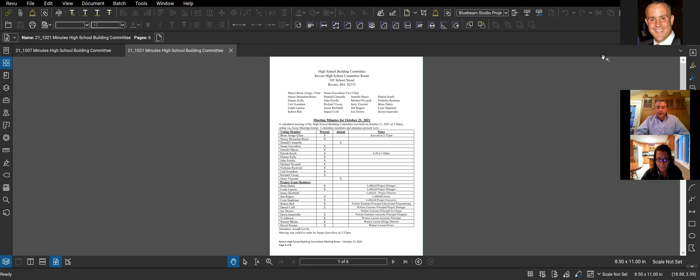We have a project update that Perkins, Eastman, and Warner Larson are going to walk the committee through. I might chime in here and there, but we'll do a quick schedule and process update, and a two-week look ahead after the update. I figure we'd get right into the update first.

So this is where we were as of the last school building committee meeting. Since this meeting, you can go to the next slide. Jack G might want to mute. Yeah, please mute if you're not speaking. So since the last meeting, the Revere Housing Authority, as you all know, voted to remove the property, or not make it available. So even without a vote of this committee, it certainly diverts our attention.

And that basically means we had three viable options in the middle here. So, Erricola Park on the existing site boundaries and constraints. We had a version of Erricola with some expanded land acquisition. And then of course we have Wonderland - not the full Wonderland site, but a medium version, the two-thirds version. So, next slide.

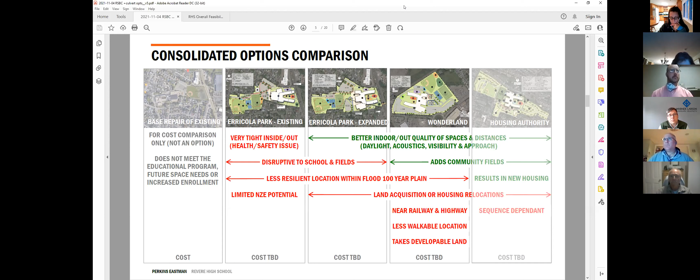So I'm going to work backwards from the Wonderland site. What we've done is we've taken some of the comments we've heard over the last couple of building committee meetings and started to try to address them. So this plan you're seeing right here is nothing new. This is the plan you had seen previously.

Some of the comments and critique we heard were about the bus and car loop and the queues - are we really maximizing it? We also heard that we maybe needed to move more parking to the fields, to surround the field with parking between the building and the fields, so it serves the after-school purposes as well. And also to look at, in all the options, the service and approach.

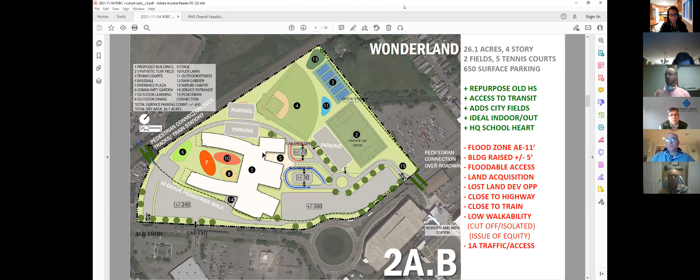So we did a refinement to this option. These are just graphically depicting how we can transfer some of the parking and maybe a different attitude about the bus and car loop. So, next slide.

You can see what we've done here. It's a suggestion, and anything we're showing here will need to be further vetted with our traffic engineer, and again, any comments and questions we hear. But what we're trying to do is maximize the bus loop and the car loop. So instead of having them as two separate loops right in the front of the building, what we're showing is that the cars would come in over at the light at Wonderland, and it would really own the frontage of the building.

So we're trying to maximize the queue. In this case, we have a 52 car queue. Ty, correct me if I'm wrong, but I think that's significantly more, maybe even double, the car queue at the existing school - although we know parents are using all the surrounding streets and parking lots as well. In this case, we've separated the bus loop and have it going around the back of the building. The idea is that this can be controlled so the back loop is really an emergency access point. It can be gated and shut after bus drop-off, then controlled for pickup as well.

But what it does is it goes around the back of the building and drops off pretty much at the entry close to the gym. So it's still a relatively short walk, pretty much a common area for both cars and buses to drop off at the front of the building.

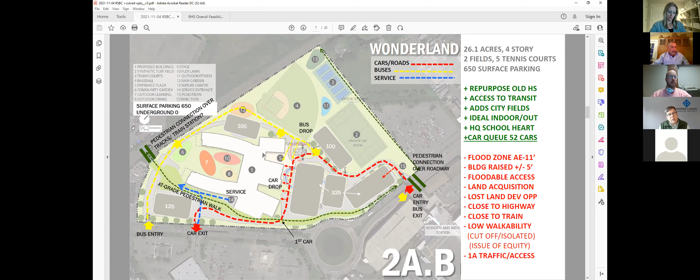Brian, you can go on to the next one. So moving back onto the existing site, this is the option you've seen previously, sometimes referred to as the bow tie. You're seeing that the existing property lines along with the culvert wedge the building, and that also kind of pushes the building pretty much against Route 60.

In this case, we were showing fields on the far left, pretty much the bulk of parking in the middle. I believe there's 255 spaces underneath the building, but again, 650 total.

So we took a look at this one too. You can see right now we were showing just preliminarily the bus loop coming in, I guess on Cary Ave, and getting the front of the building, and then the cars were coming in on School Street and looping around. That's a concern for Cary Ave. It also doesn't really leave a lot of space for the bus - the bus and cars are competing.

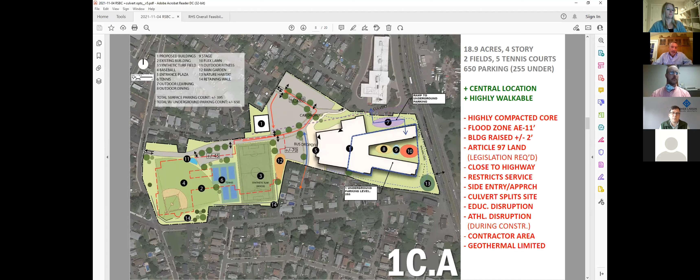So the next slide shows, again, a variation. This is just one iteration, but what you're seeing is the building and the fields. In this case, we've now maximized the car loop, so if the cars are coming in off of School Street, they really own the front of the building as far as drop off. And there are options here.

They can exit out True Street. They could return along the approach drive and exit out onto School Street. It's doubtful in this case, but they could possibly use Cary Street.

In this option, we were suggesting maybe the buses come in True Street, but we know that the far end, the northwestern end of True Street, is kind of that five-way intersection with an island. That's a concern for navigation. So to do this, it would take some work at the other end of True Street. But that's only one scenario.

We had the buses coming in and skimming the northern side of the site so they could drop off students into a secondary - or really, actually that's the main entry on the north side.

And it's possible that the buses just come in off of School Street as well, just as the cars do. But their drop off point, again, is kind of on the north side of the building as opposed to the cars that are looping around.

It would still take a bit more work. This is certainly a pretty tight site. You can see the culvert is the purple line that runs through from the west to the east.

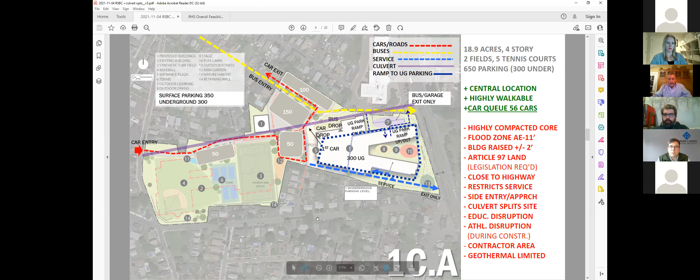Bob, want to keep clicking? Yeah, we can continue through, which is your segue really. This option that we're going to discuss right now is the option that includes potential eminent domain takings, and we'll touch upon it in the next slide or two.

So this option, again, you've seen this version, and we're going to show you a refined version. Based on the comments, in this case, we have cars coming in on School Street. You can see there's a red line, really. They have the northern loop into the site and then back out True Street.

The buses here were shown separately coming off of, I believe it's Cary. And there were some comments about these being a little bit too separate, not enough ways in and out, maybe a little bit too small.

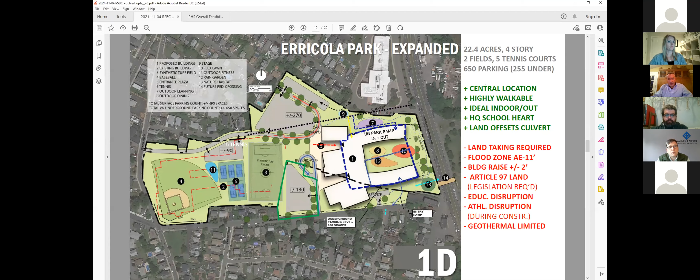And so what we did is the next option shows a variation where, again, there's options with the bus. We're showing the yellow dash line where the buses are coming in True Street, but given the concerns, they could come in off of School Street and the main drive, still drop off on the northern side. Cars would be able to come in that long approach and then use the frontage of the building.

In this case, we're showing that it's possible. We could have a larger car loop in front, or we could take a series of houses that are shown here in kind of the middle of the site, and basically not take that land. So technically the building fits around that, and with the separate car and bus loop just a little bit further north, that could remain.

And overall, as far as the parking, we have 375 surface and about 275 underground. To put that in order of magnitude, I think for a school this size, usually the rule of thumb is 12 to 15% of the enrollment would be the teachers. So we're talking somewhere between 300 and 365 staff potentially. So the underground parking here is a little bit shy of that.

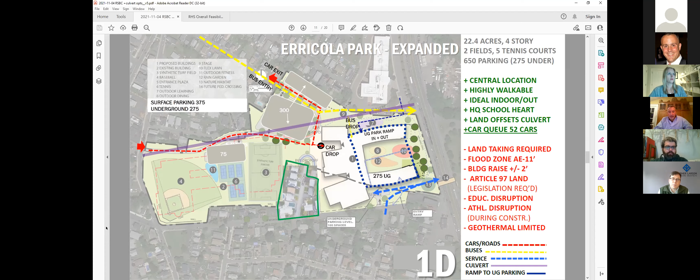Could potentially be increased if it were to become all teacher parking underneath the building and then leave surface for students and visitors and for field use. But in this case, I guess the benefit might be that it might require less land in this variation to make it all work.

And just real quick, I see Patrick Keefe's hand up.

Brian, thank you. I just want to, you talked about parking, and that was something that piqued my interest. Where, as we know, vertically is probably the only way you can go. Is there something against building more stories to a parking space or a parking garage? That would probably alleviate some of the issues.

And we do know, I'll take Everett High School into consideration. They built a wonderful high school, and they found out recently that a lot of the students were parking across the street in the MDC lot. That's since been removed, and that's caused a lot of issues for Everett High School, not having much parking, because seniors drive to school, not all of them. I know when I went to high school, I drove and would park two streets over in front of a neighbor's house. As we know, 25 years later, that's going to be very difficult in that neighborhood. So I think we'd probably want to get ahead of that.

Yeah, Patrick, I think we're definitely gonna study maximizing the underground parking. And the further down you go, there's a cost discussion, but I understand we're balancing cost with need here, and cost with what's the right thing to do. So I think we'll continue to see how big we can get a single level underground, and then do some study with the design team to see if we went down another level, what the trade-offs would be cost-wise.

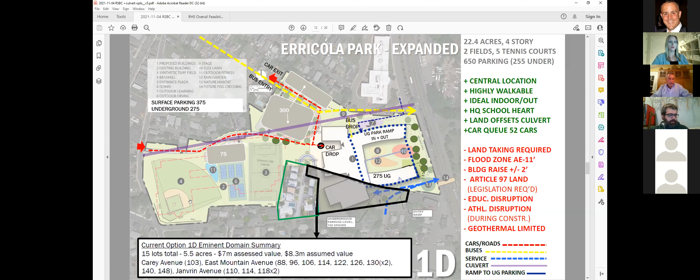So a lot of what we've been focused on, now down to three options, we know we've been hearing from abutters over the last few weeks, their concerns. We know the existing site on its own, with the culvert as a constraint, really squeezes the building into uncomfortable tightness. And we know that with Wonderland, there's a land purchase and concerns about lost tax revenue, as well as the walkability.

So what we've been doing over the past week and a half is exploring what we could do if we looked at the culvert, either breaking the building and having some of the program on the other side of the culvert, or diverting the culvert, adhering to maybe a 30-degree bend, just giving ourselves a little bit of wiggle room. So you're seeing some architectural sketches roughing out what we could do with the building, different shapes, and what programs could go on the other side.

I think we thought the gymnasium and the health and fitness, as well as the central admin, would probably be the obvious choice. Although I don't want to pretend that's a great separation, because it does pull some of those programs out of the building literally, and away from the heart of the school. Remember, we are a 4-story building and the gymnasium is stacked over locker rooms.

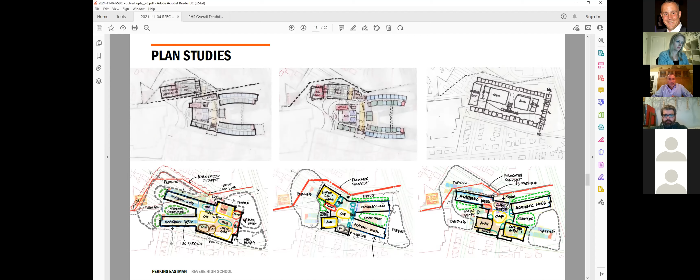So if we go to the next slide, this is just an architectural sketch, so I'm not expecting everybody to understand what's inside, but I can point out that you're seeing the academic classroom wings with science and special education on the north side. Those are two wings, four stories. Nested in between them is the custodial and mechanical space, which means that service is now coming in off the north side of the site, which kind of mirrors what's happening with Rumney Marsh.

And in the center of the school, you have the heart that connects all the floors. It's the main cafeteria, where the auditorium, tech and art spaces all feed off of. Into the bottom right is the gymnasium, so again the lower level would be locker rooms and fitness. It just so happens that this gives us the first option that has JROTC all on one floor, probably in its best configuration that we've seen, and it seems to start to connect the pieces internally pretty well.

So this does come at an expense, and what it does is now the building has given itself some elbow room. Things are working a little bit better, it shifts a little bit from the roadway, and you can see in the bottom right-hand corner it leaves some open space. It could be fields or it could be parking. Our initial thought would be with the gymnasium right there, it might be good to have just open field space, buffered from the roadway. It could serve the PE program, but it could also be parking.

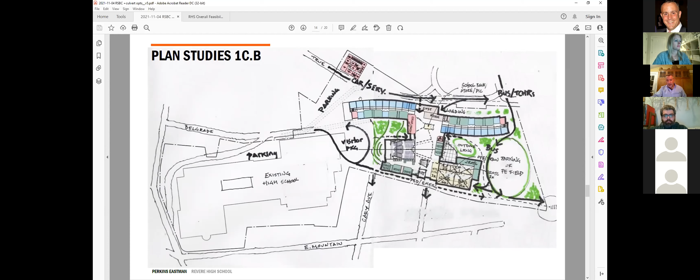So the next slide shows really a site plan pulling this all together. The white square in the corner of the site is central administration, and you can see otherwise the remaining white footprint of the new school building. In this case, cars could come in off of School Street, they have a long approach to the school, and a total of 56 cars can queue up in this length.

We've got parking along the way to kind of break it up, but also to remain closer to the fields. We've got a total of 275 surface parking spaces, and 375 underground, which is again about the right amount, maybe a little bit over for what might be required for staff, so that might be considered staff parking.

In this case, as cars come in the entry loop, there's also plenty of options for them to exit Carey Street or further down on Janvrin, as well as continuing out on True Street or even out to Route 60. The purple line here at the north side represents the culvert with the 30-degree bends.

In this case, I think we originally thought maybe buses come in initially on True Street, and then the more we looked at it and talked with others, we were realizing that's a complication, and there might be advantages to having the buses come in off of Route 60, just as they do maybe for the Rumney Marsh School, continuing on the east side of the site. So we're creating a bus drop-off, really separate from the car drop-off, but the students would all filter into the center of the school, into the heart of the school.

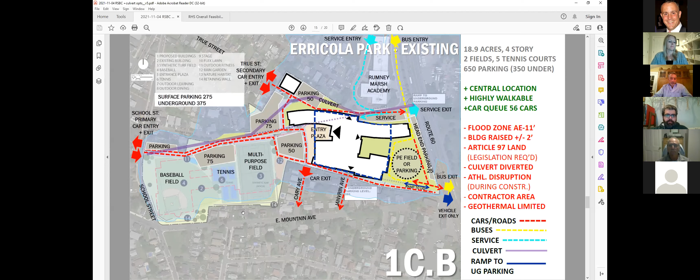Bob, did you want to finish this up? Nope, that's just an overview slide of where we are now with 4 options, and barring any votes or requests for us to examine something different, these are the ones that we're going to continue to explore.

One thing I'd like to throw out for the committee to think about between now and the next meeting: look at these slides. I'd really compare what I'll call the old no eminent domain option to the new no eminent domain option. I'd really like to ultimately hear from the committee. I know the team feels the new option is superior in a lot of ways to the old option, so perhaps by the next meeting it would be nice to see if that's a consensus, not only on the team but on the building committee, and maybe just focus on the newer no eminent domain option here.

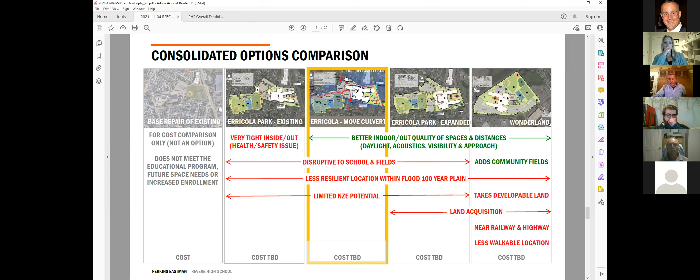Excuse me, I'm going to switch PDFs really quick. General feasibility schedule, really not much different at all from last month. We're going to meet again in 2 weeks. By the meeting at the beginning of December, we're going to coalesce together a little bit of a history of the process and run through current options, including construction schedules. That's going to set up going into December and January meetings in terms of whether it's school committee or city council.

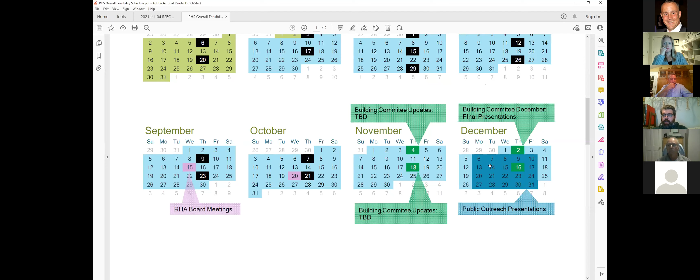We'll schedule a community outreach session dedicated to the project as well, but the goal is to keep developing some of these items. In December, we'll be adding the final pass at budgets, construction budgets, total project budgets for these options. By the beginning of December, we'll be showing you construction options. And jumping into 2022 next year, we're still looking at bringing this all home by the end of January and choosing one of the Thursdays in February for the building committee to make the final determination.

We would then move directly into schematic design, that's all these months in yellow here. The preferred solution that we'd be submitting, based on the February decision by the building committee, would rattle through an MSBA, Mass School Building Authority, approval cycle. We've got to get them the submittal by March 3rd. We meet with their facilities assessment subcommittee for 2 separate meetings in the middle of March. And ultimately the board of directors blesses the decision.

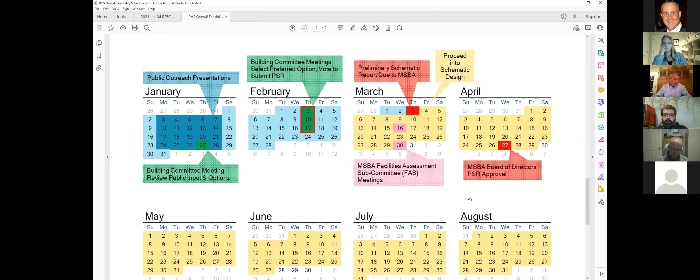Moving forward, we continue on until fall of next year, developing that single chosen option, working out a lot of these designs and details both inside the building and on the sites. That all leads towards a September schematic design submission to the MSBA. That schematic design submission is what sets up what's called the project scope and budget agreement, a real key document from the MSBA that really locks down the plans, how the building's designed, how big the building is, where everything exists, what the budget is, and what the schedule is.

MSBA approves that in October at their board meeting, and then we would be seeking city council approval for the entire project to authorize the full budget. Again, keep in mind, we're only doing a feasibility study and working on a feasibility study budget right now.

So ultimate action is city council approval of the preferred option and schematic design next November. All of our schedules, when we show you construction schedules in the coming weeks, are triggered off that decision being made in November, early December, and the project hitting the ground running from then.

Because until the MSBA's project scope and budget agreement is executed with the city via approval of this board and the city council, there's really not a project for us to run with. So all of our schedules queue up on approval of the project by city council next November or December.